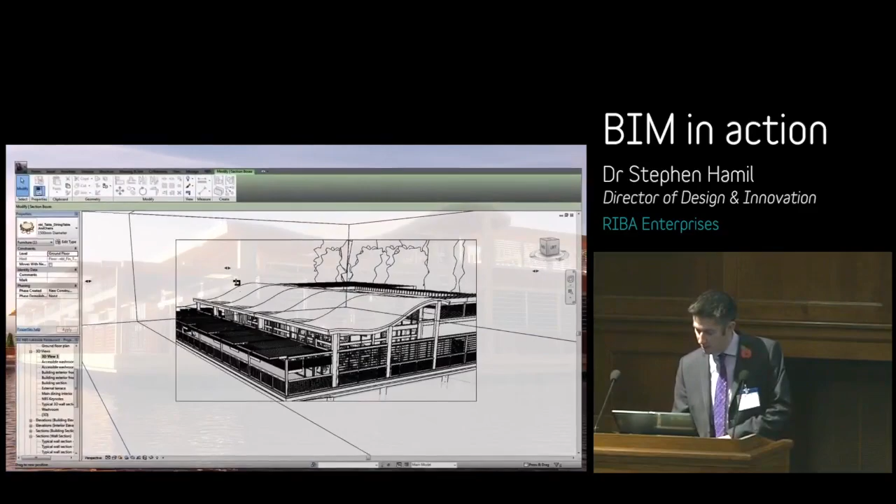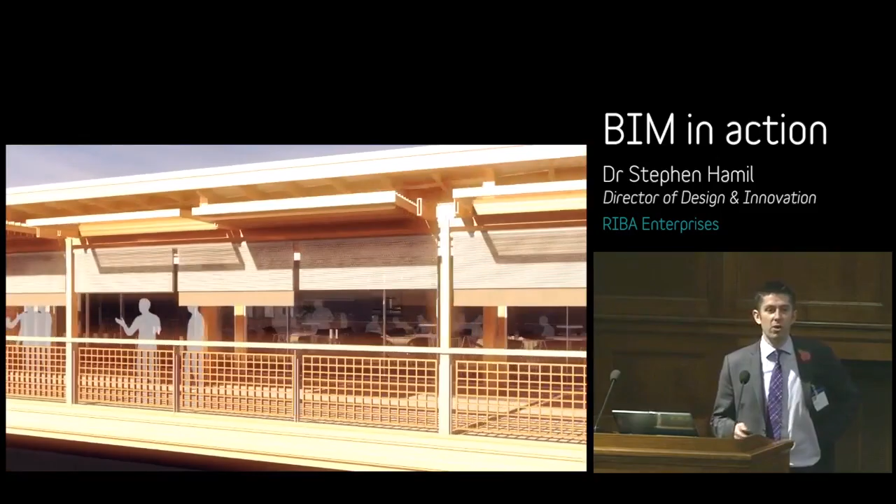First thing I'm going to do is show a little video to illustrate the visualize side. This was the video that was playing when everyone came in. This little movie's been put together from one of those 3D models that Dave talked about, and the quality is incredible - it allows you to actually visualize the building before, maybe at that concept design stage.

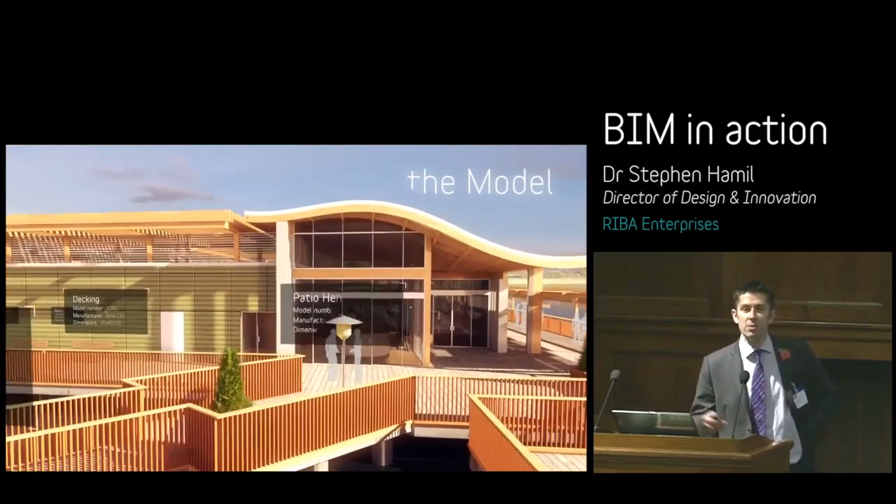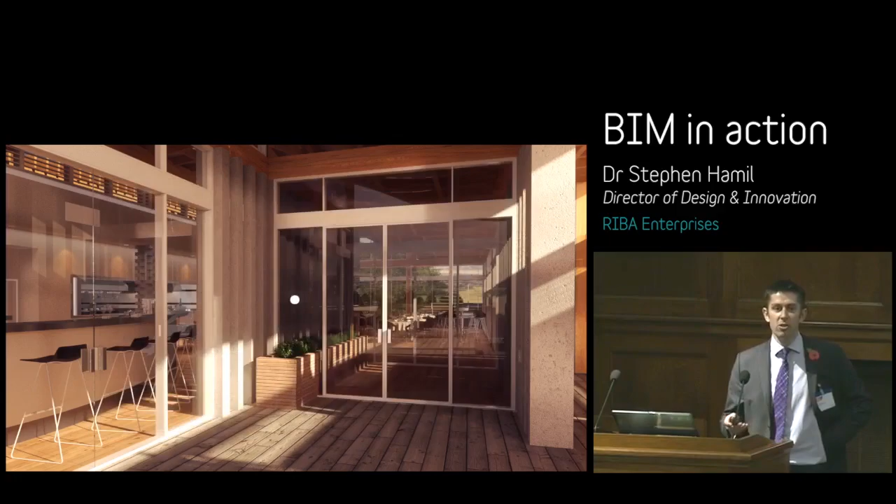So you've got advantages there right across - sharing the vision amongst the project team, also sharing the vision to the client, selling the dream, winning contracts. That's an amazing thing that's possible now at relatively low cost, as opposed to trying to win bids 5, 10 years ago.

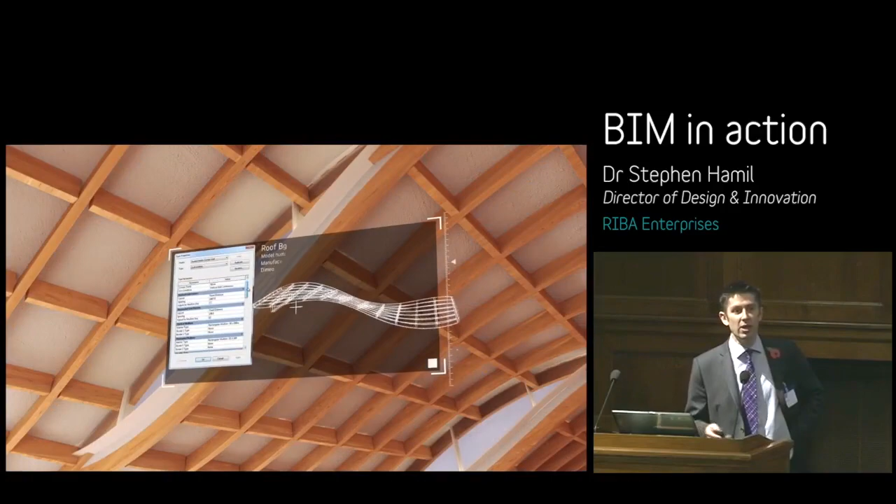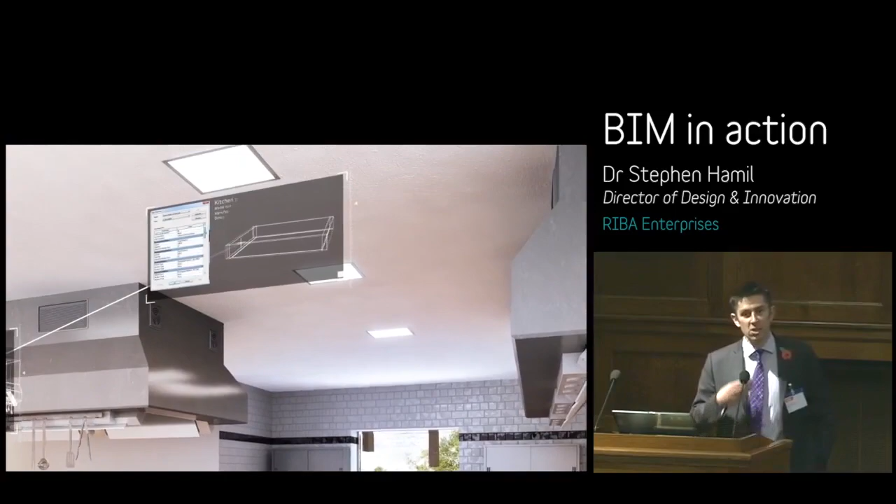And then the client can take those visualizations, that dream, and sell it to future occupiers. So if you've got a large office block that you want to rent out on contracts for the next 10 years, you can start getting that in prior to the building getting built. You can also share what the building's going to look like to the local community, so they can see the sort of building that they're getting built in their area.

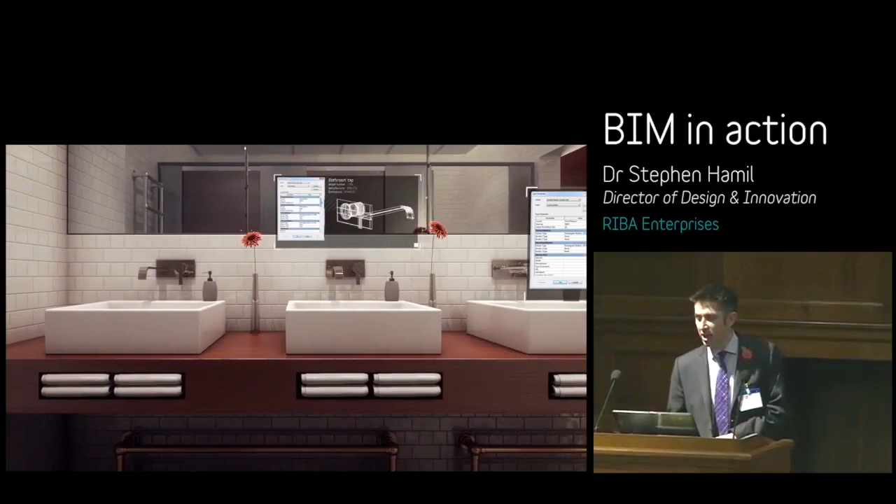So it's a bit of a superficial benefit of BIM, but the visualize side - you can watch that whole video on our website, the link is in the presentation. But moving from visualizations...

Moving on to coordinated design. So when you think about coordinated design, how that was done in the old days was people on the drawing boards, and you'd have to coordinate all of the different drawings that communicated your design together. You made one change in one drawing, you had to then update it on all of the drawings, and then different consultants as well.

And that's the sort of thing that's so easy to make a mistake if you're working in traditional CAD - delete the door, it deletes it from all the drawings, all the schedules, all the sections. So making sure that the information that comes out of that single model is coordinated is fantastic in terms of efficiency and also quality of information that comes out.

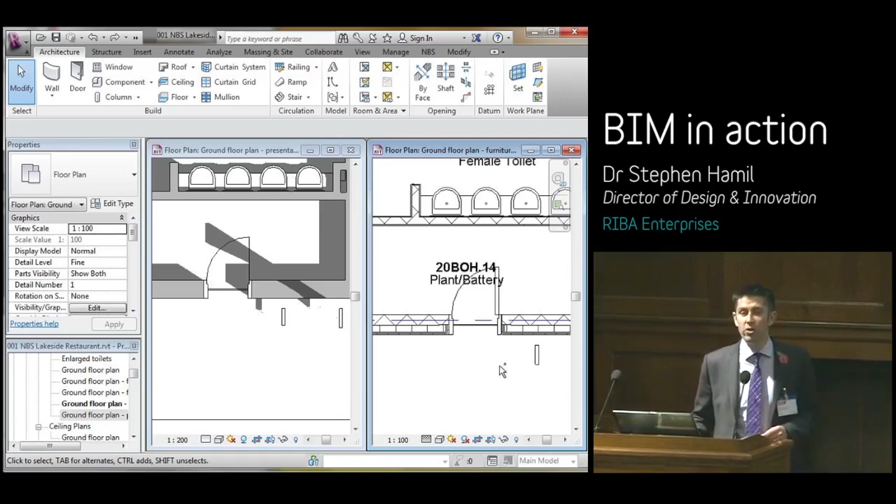So moving on to the third great thing about BIM, or cool thing about BIM, we look at space usage. We've got 2 generic boilers that have been put into a plant room, and that might be at an early stage - you don't know what the manufacturer is of the boiler, you just know the building of this size needs 2 boilers. And it's not just the boiler itself, that could just be a rectangle cuboid on the wall.

It's the space around these MEP objects, because you're going to have to go in and maybe change the heat exchanger. After 5 years, the boiler might be faulty, you've got to take it off the wall, and you've got to be able to get around. So these particular BIM objects there from NBS, we consider the space around as well, so you can see a clearance zone. That's been done researching the leading manufacturer recommendations out there. So the service engineer can get the model from the architect, the structural engineer, and put the services in that are required, but check that the space allowances are there. So you can see that boiler's too close to the wall, you move it a little bit, you move the other boiler, and you can get the right space requirements for operation inside the various plant rooms.

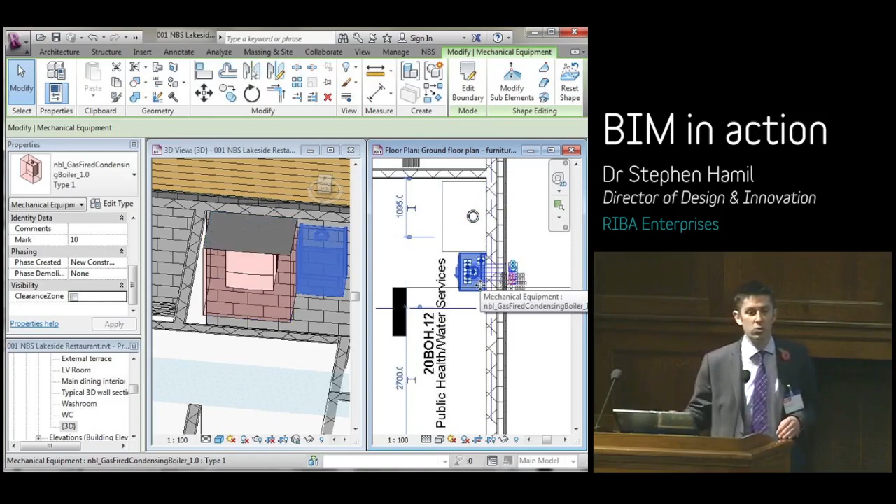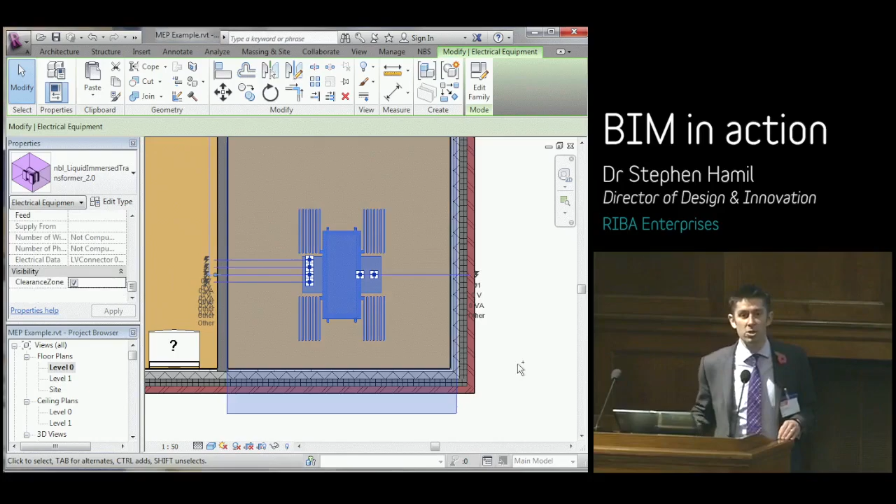If you look at a trivial model here, just with some other MEP objects, again from National BIM Library, a free resource to industry, we look at the transformer, and if that's got a dedicated room in the plant room for the liquid immersed transformer here, again from the basic regulations and standards for the UK, not the United States, not Australia, not the Far East, there's a 1 metre service zone that can be indicated around the transformer, so the space that's needed so one person can safely operate it whilst maybe a colleague comes behind. You can see there the plant room's not quite big enough for that transformer, so you'd maybe want to send that model back to the architect and get them to move the partition wall a little bit.

Maybe a slightly smaller object there - again it could just be that the geometry is not the most important thing here. There's a little sounder on the wall, and what you can do is toggle a little option, and you see the symbols that are typically used by consultants in the UK to indicate service engineering devices that are reasonably small. So you can imagine you zoom out of that floor plan a little bit, you can scan across the spaces there and see exactly where the sounders are.

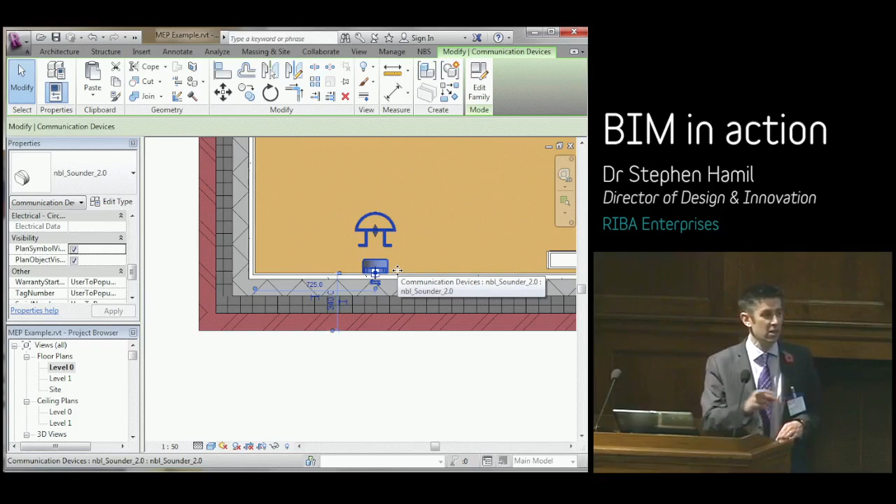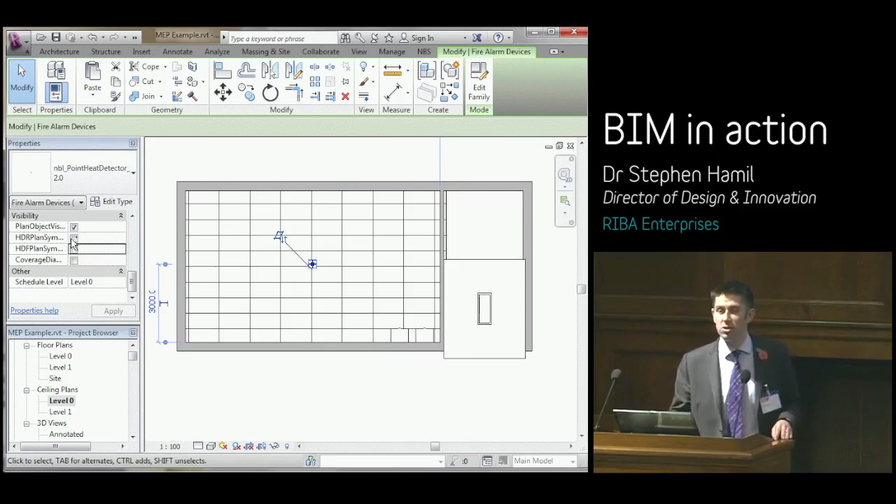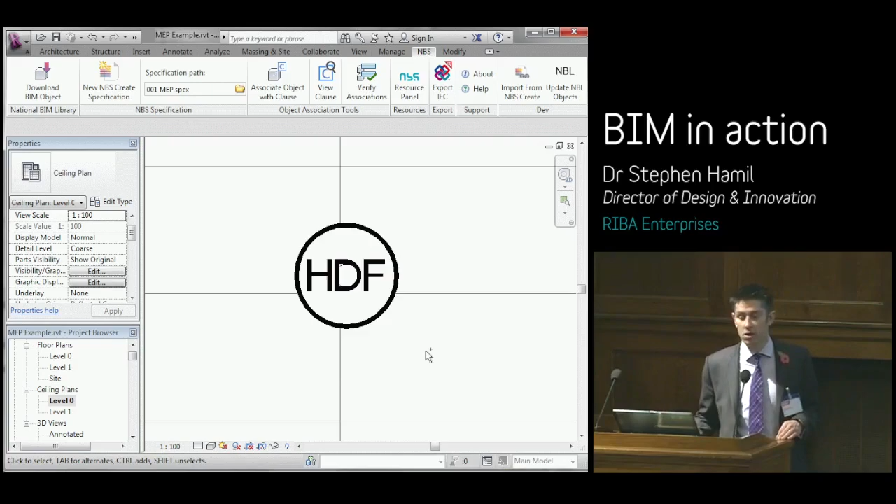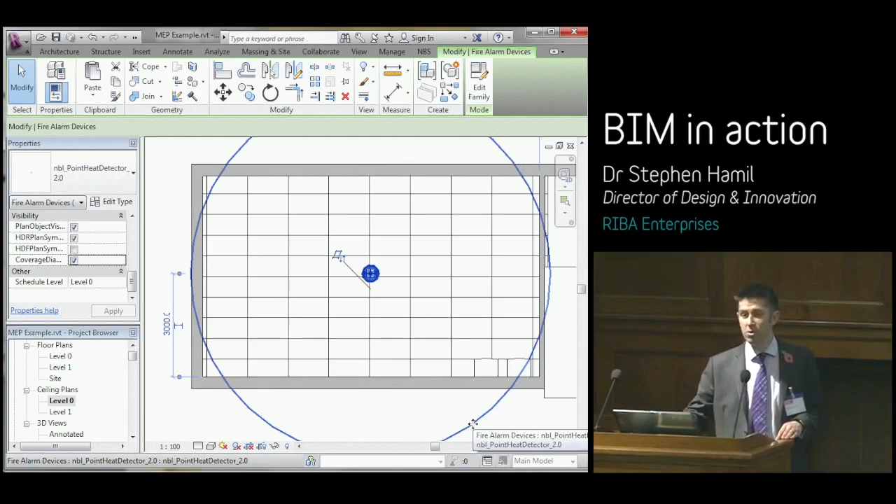A final example here, staying on the engineering theme: here we've got a point heat detector in the space, maybe in the plant room again, and you've got the little symbols again, you toggle on and off. So here we've got a heat detector with a fixed detection rate, or maybe a rising one. In a boiler room, you'd maybe have a fixed point heat detector, and you can indicate that, along with the area around - a coverage diameter. In the UK, British standard indicates a diameter of something like 10.6 metres. So you toggle that on, and you can see how many heat detectors you need for that particular space - probably you need maybe two heat detectors for that plant room.

So we've had the visualizations, we've had the coordination of the geometry, and then a little bit around the space required around the geometry. Again, staying more on the design side, analysis of the information. So if you look at any of these 3D BIM objects, it's not just about the geometry, but inside there's a lot of information, a lot of properties, and those properties actually relate to each other.

Over and above that, you have performance properties, as defined by the international IFC 2x3 standard, and operational parameters, as Dave was mentioning with COBie.

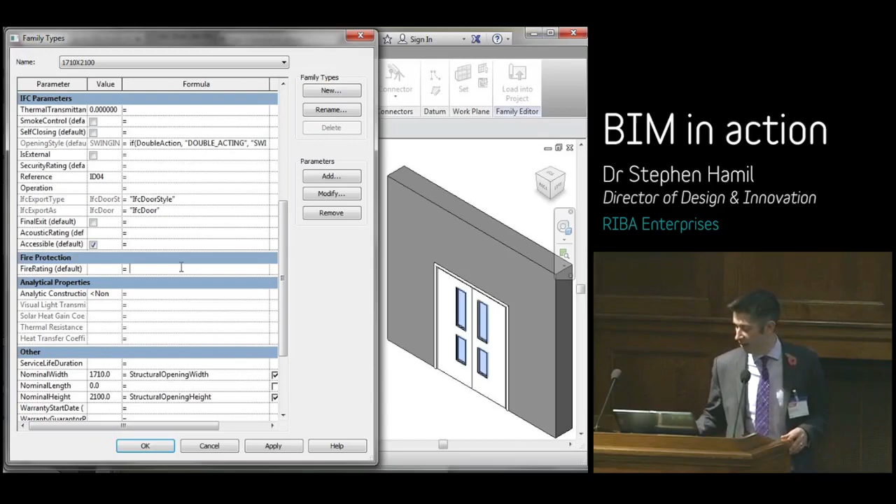Things like who was the manufacturer, what's the model, where's the installation manual, operation manual, expected life, etc. So you could take some of those performance properties. For a door, you might think of it in terms of acoustic performance, fire performance, and the little numbers you can see on the drawing here, the number 60, they're actually coming from the properties inside the 3D model.

So that number 60 indicates a fire performance of 1 hour, 60 minutes. There's a little bit of color coding here on the analysis to say everything that's 2 hour fire rating turns red, everything that's 1 hour fire rating turns blue. If you think of the UK regulations around a kitchen space, approved documents for fire safety, it's a 2 hour rating, so a commercial kitchen needs 2 hours fire safety for all the elements.

So you can quickly see that those doors, those internal double swing doors, haven't got the correct fire ratings. You visually see that through the colours, through the numbers, highlight them, change them to 120, and you see the colour turns red. So you could then show that to the fire safety officer and the client.

They can scan through that fire drawing and see all of the different fire ratings, the various escape symbols. So you see the exit sign, as you see over our fire exits, oversized in 2D plan, in line with things like heat detectors, sounders.

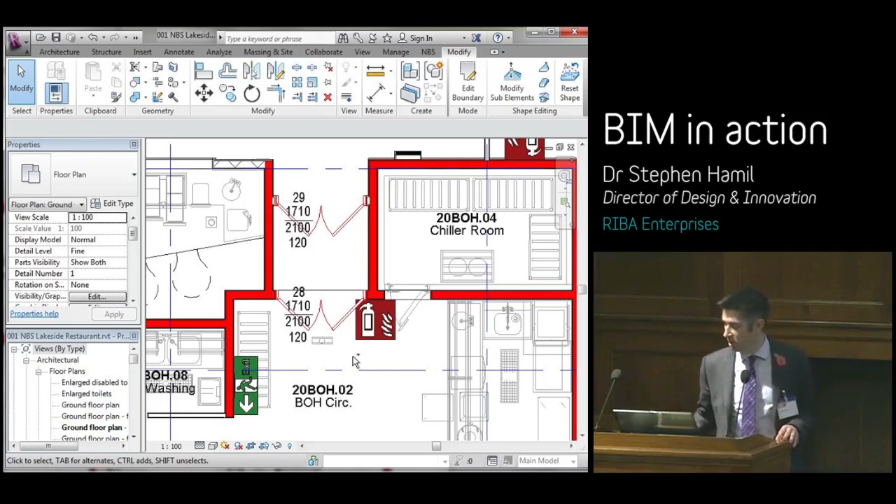Building on one of Dave's points, it's not just about the information trapped inside those 3D objects, but the whole wealth of information across the project team. That includes specification, cost information, environmental impact. And if you look on the specification side, the leading specification products out there are now object-based as well. They're not objects you can see in 3D, but they're objects that have got property sets and are related to other objects.

So what we can see there is a specification for a low temperature hot water system. And before thinking of any of the products—maybe you're not getting paid to design any of the products—you can actually design the overall performance of the heating system.

So you can see here I'm invoking specification clauses for the performance of the heating system, for the quality of the design, for submittals. And then at the bottom of the heating system, there's also specification clauses, objects with property sets, to talk about system completion.

When Dave talked earlier about soft landings, making sure the client gets the best possible building for their money, it's all about specifying the correct performance. And if we look at the little clauses here for system completion, it's about commissioning, performance testing, to test that performance has been met.

It's about demonstrations, so the client can actually use the heating system, inspections, test records, documentation, operating tools, services and maintenance. That's the sort of thing when consultants are working for the client, they want to really get nice and tight in their performance spec and model that information.

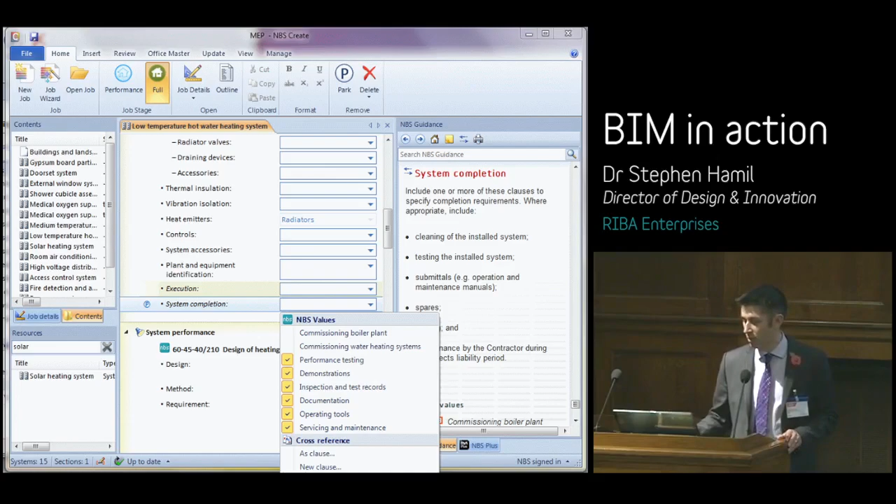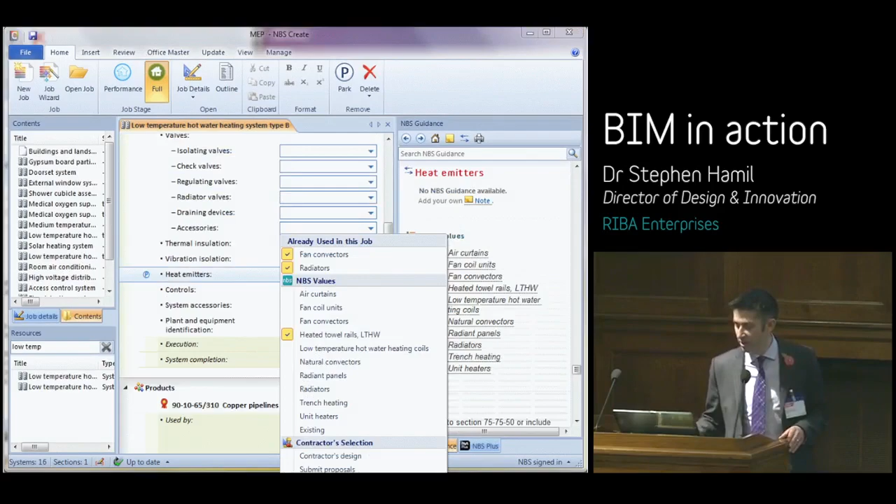You can also use these specification tools to pick all of the individual products. So come across here and pick a particular sort of fan convector, radiator, towel rail, and specify that generically. But then sometime down the line, someone's going to pick a manufacturer's product based on the generic specification. So I could specify a particular boiler through its heat output—it needs a flue on the top, it's got to have certain seasonal efficiency.

And then at some stage, somebody, whether that's contractor, subcontractor, or even right at the start, the client, somebody will pick a manufacturer's product. And here you can see the Econoflame R30 Stokvis boiler is getting added to the specification.

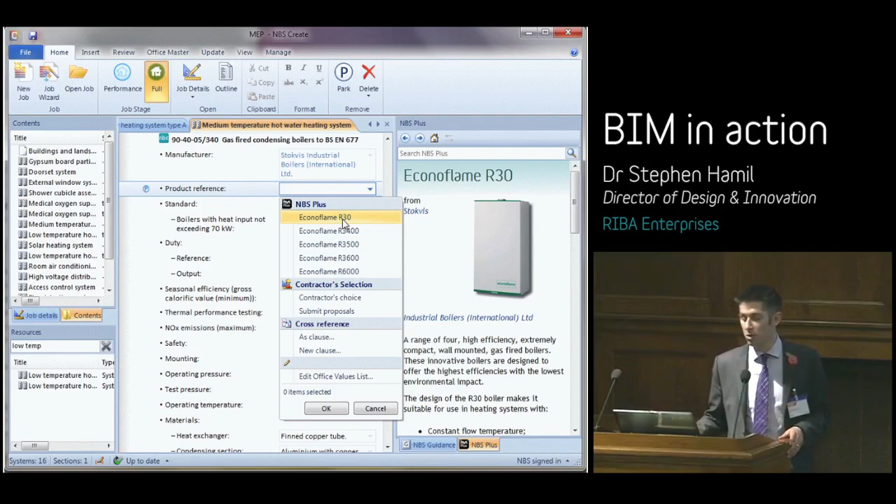So 2 more cool things to go. This is coordinated information. We've got great property set information built up in the specification. We've got fantastic stuff over in the design model. How is that information coordinated?

What you can do here in the UK—there's a little plugin for many of the design tools. Our company, NBS, has got a plugin for AutoCAD, Vectorworks, Autodesk Revit.

Through that plugin, you can actually link information in the design model to the specification, to the guidance, to the standards, to the regulations. This is something in the UK that we believe we are real world leaders on. We watch what's happening in Australia, in America, in Scandinavia, and nowhere else in the world has got the link between specification, guidance and the design model.

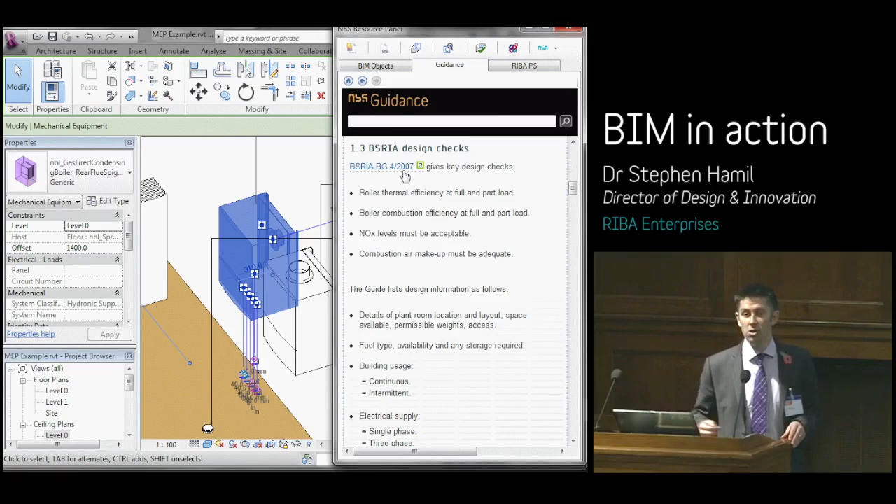So here, the user clicks the boiler. On the plugin, they ask for the technical guidance, and you can see all of the design guidance for boilers. We've got the BSRIA design checks, biomass fuel steam boilers, regulations and bylaws, environmental issues. This is the information designers need at their fingertips, through the combination of quality UK information linked with leading international software packages. So we can click on the BSRIA design checks and go straight to the BG4 document.

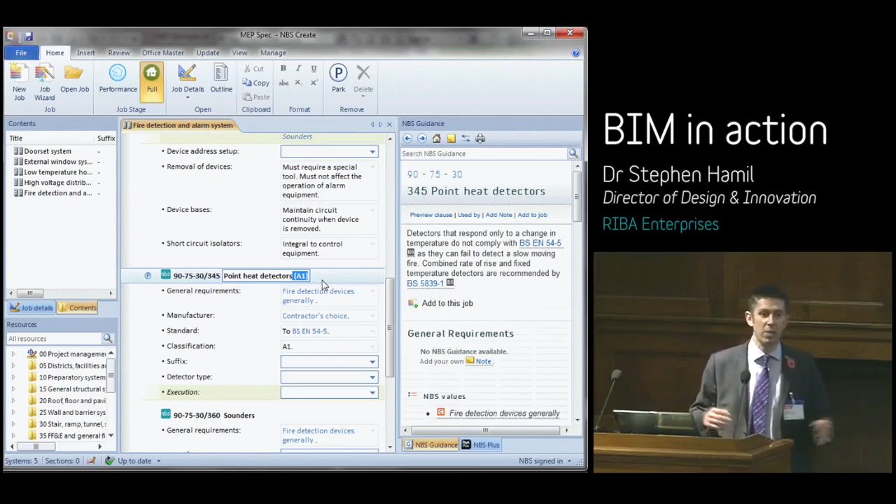It's not just about feeding information in, it's about coordinating the information. So in the specification here, we changed the point heat detector to an A1 classification. Annotated on the drawings, the titles may not match, or it might have been removed from the spec and no longer be in the drawing. You can ask for a report, and it flags up where the problems are. It's not quite as seamless as changing it in one drawing and it automatically changing in another, but the information's getting flagged up.

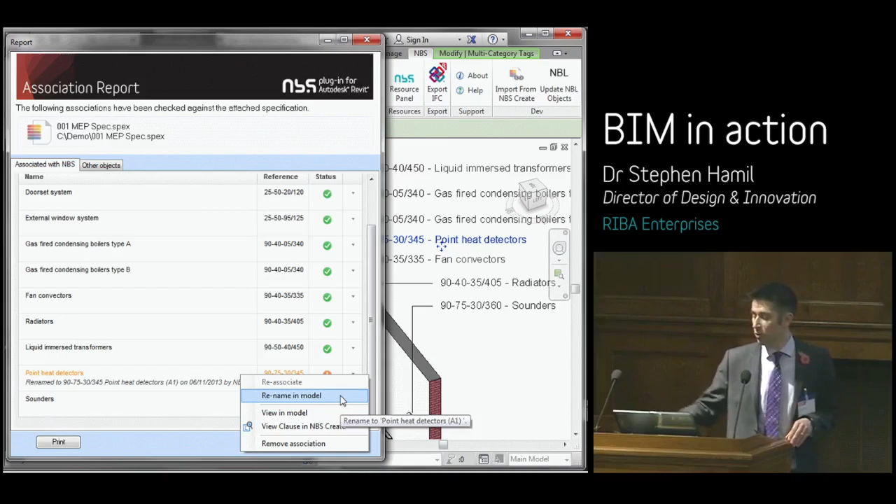So the architect has changed something in the spec, and the technician working in the design package has now got a report of that. They can have the conversation and push that information through. So if you watch what happens to point heat detectors on the right, the title comes through and coordinates, and you've got no further problems.

So you haven't just got the specification and the design model coordinated, you've got the objects coordinated within those two models. And what we're working on is taking it to the next level, so it's not just the objects but the properties inside the objects. We're not talking about putting all the information in that single geometric model, but you do want the key information there that will help you with analysis and with things like instance schedules, door schedules, radiator schedules, mechanical equipment. So let's look at the schedule here.

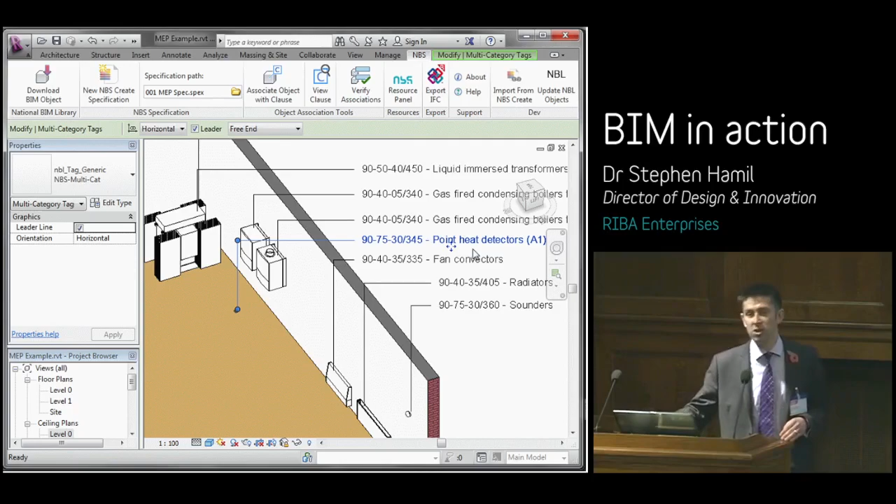We can see we've got the two boilers, type A, type B, with their property sets. Over in the specification, this is probably where you want to make those decisions. So what are the NOx emissions? You read the technical guidance, read about the BREEAM assessor's manual, and you want to drop 70 milligrams down to 40 milligrams. You make that change in the specification.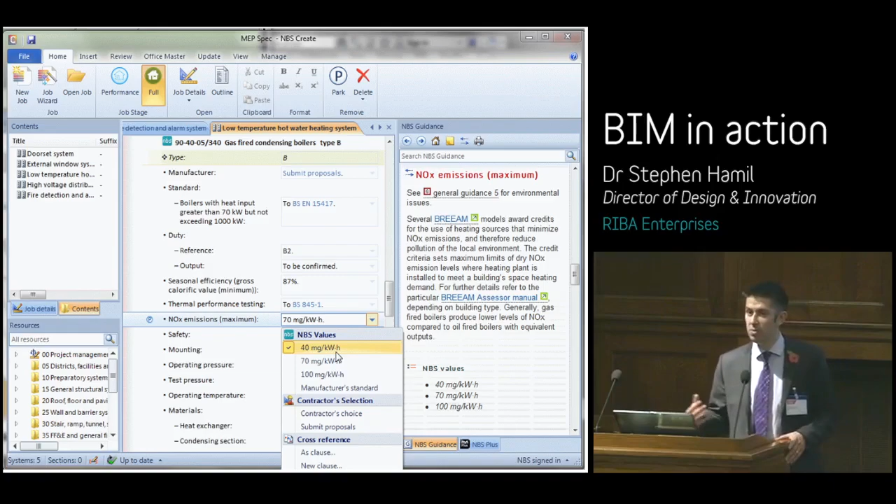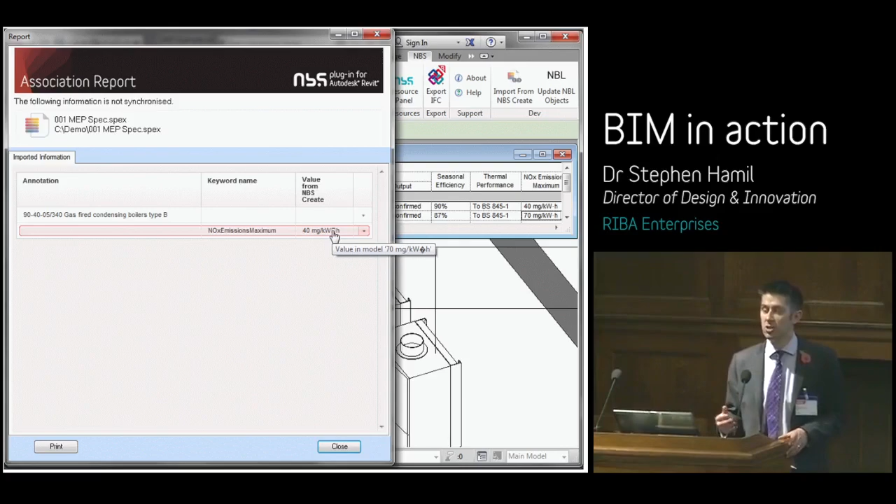Now you've got a problem, because that's incorrect with what's in the design model. And that's always been the case, whether you were doing a drawing on a drawing board and a spec on a typewriter, but you've never had help before. Now with BIM, with the technology available, following the right process, you can click on that report, and it tells you 40 milligrams in the spec, 70 milligrams in the design model - what do you want to do? You can make that informed decision, and it's pinpointing and highlighting it to you.

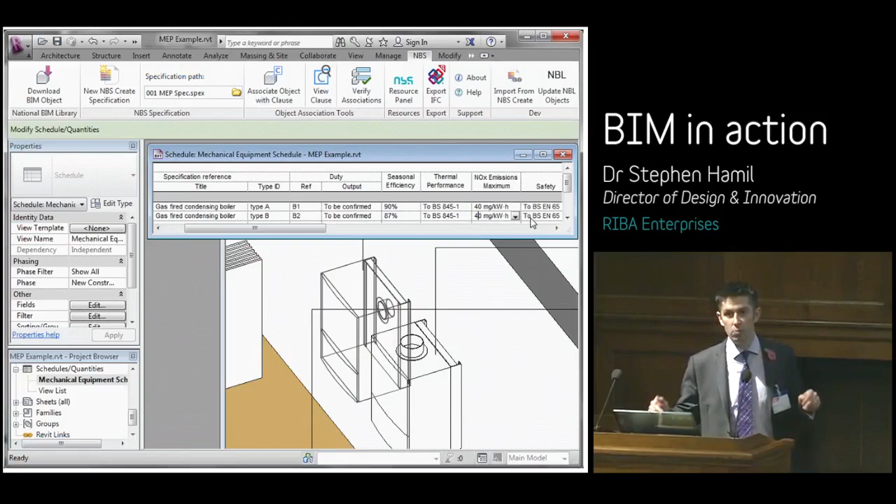Pull that up, and all the information is now coordinated, not just at the model level, not just at object level, but at property set, at the real technical information level.

And then finally, checking on time, information flow. So the seventh cool thing that I personally think about BIM is not just the information at design time - and this is probably the most important - the information flowing right through construction, handover, and in use.

The way I talk about this is maybe a little bit oversimplifying it, but if I was writing a document in Microsoft Word, there's loads of amazing functionality. I can do mail merge, track changes, add comments, and use whichever package I want to write my document. But when I want to issue it to somebody else, Microsoft might go out of business in five years' time, be overtaken by Google or Adobe. I want that to be in a format that any other software can read.

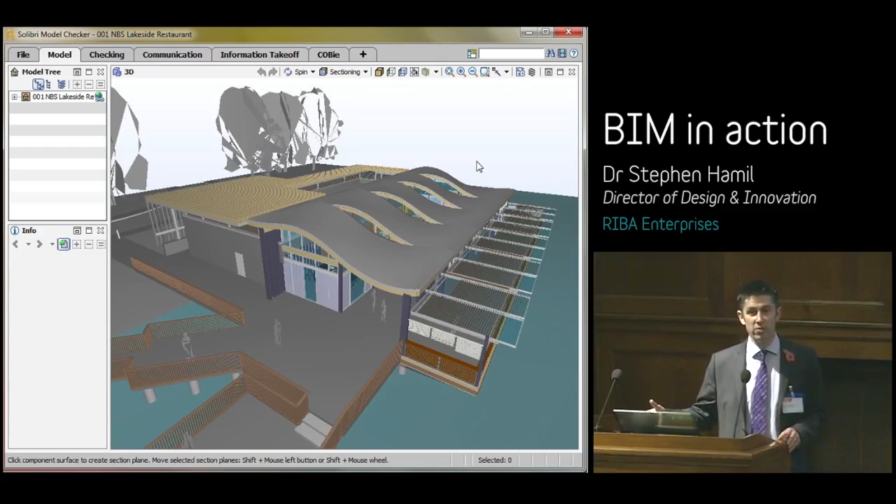So I export it to PDF, and the client can use a free tool, Adobe Reader, to read all of that information. It's still got its structure, its table of contents, its hyperlinks. Construction has that same principle, because you can export to a format called IFC. Here's exactly that same model, and the information from design tools like Bentley, Allplan, Vectorworks, AutoCAD, our sponsors Autodesk, can be pushed into this IFC format, and also from things like the specification tool. So you're getting all of that information into an open source format that the client can query.

So what about that boiler? What's its spec? What's its installation manual? What's its operation manual? And that's there at the client's fingertips now. And the speed that technology is advancing, this is the sort of stuff you can get on your iPad now. You could go around the building, say, which room am I in? What's the operation manual of this boiler? I've got to change the heat exchanger. And that information's at your fingertips.

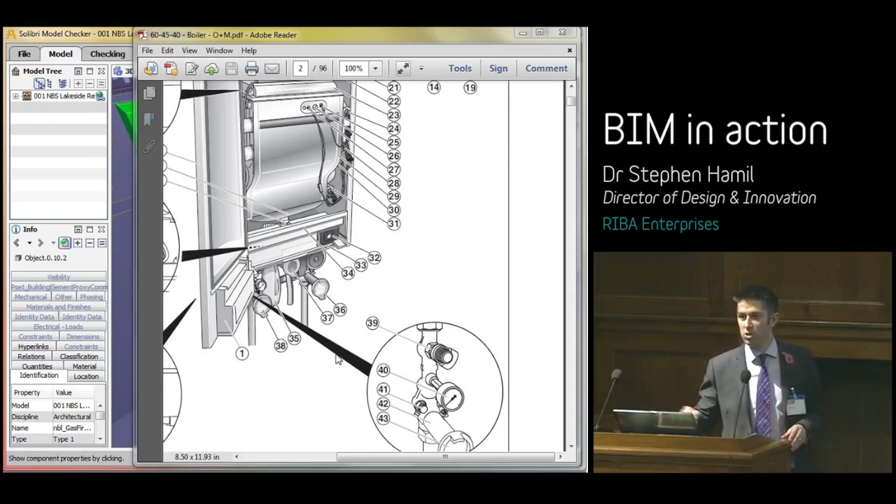And it's not in a series of 5 boxes down in the boiler room, which have got wet because the boiler room flooded. It's there digitally in a robust format. And more advanced, intelligent clients can query this IFC information any way they wish. So give me a report on all the doors and the different fire ratings, acoustic ratings, what rooms they're in. And there's that report coming off IFC, an open standard format.

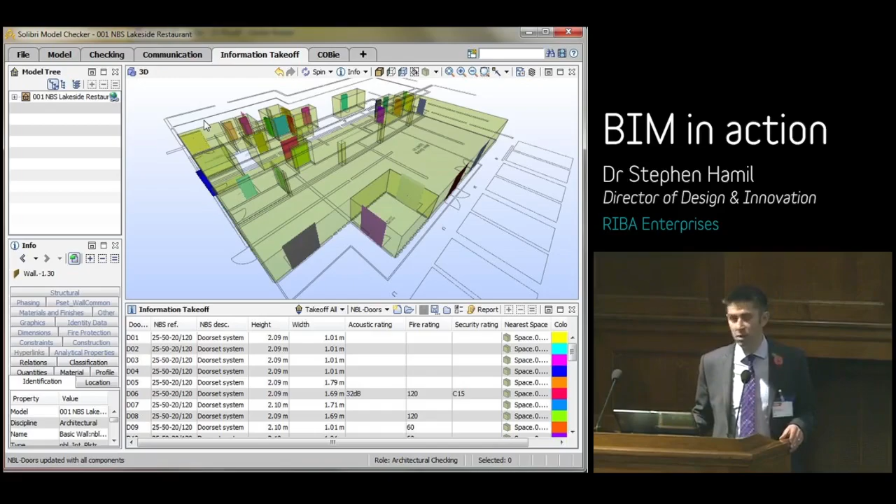And then finally, Dave talked about COBie. In fairness, it's a hard subject to do justice to in about 30 seconds. But COBie is that standard, almost dumbed down format of IFC. So you've got the IFC model at the top, and at the bottom, what you've got is the COBie defined data set.

In its most simple terms, what you can see on the screen is a building - if you look at the little worksheets, it's facility properties, how many floors, how many spaces on each floor, and then the components in. You can click on any of those little worksheets. It's attached to a relational database and you see that important information in an open standard format that's not tied to any one software vendor, whether that be NBS, Bentley, Autodesk, whoever. Open format data for the client in a rich digital form.

And that essentially is the government's strategy when it comes to BIM: let the market compete on the best products, but at the end of the day, we want it in an open standard format for our FM systems.

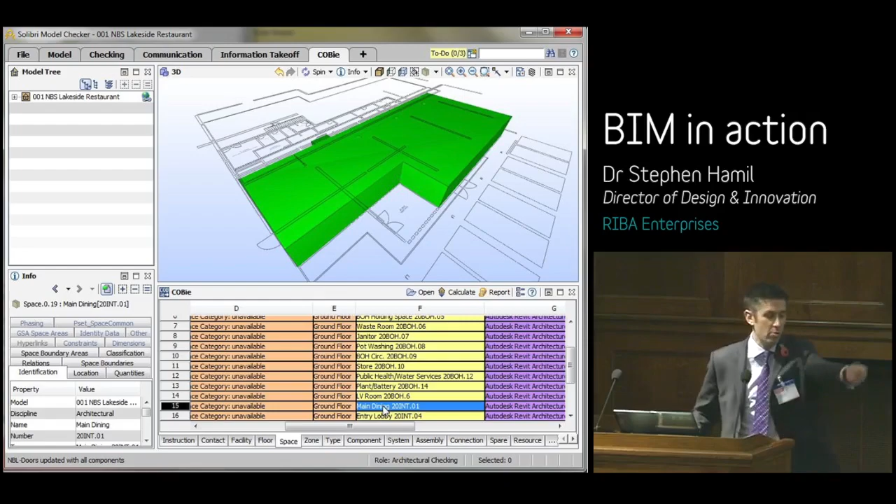So, in summary, just about on time - BIM is happening. Clients, designers, contractors, as you're going to see today through some fantastic presentations, are using BIM now. What we're looking at there is in the market now. That's not future gazing in 10 years' time. This is happening at the leading edge of UK construction.

And why is this happening? It's happening because it's a more robust and efficient process, right through the project timeline. If you get a chance, go and download the new RIBA plan of work, which talks about that information flow from strategy to preparation through the different design stages - concept, developed, technical, construction - and you can use that BIM process all the way through.

And there's plenty of free support out there to help you on your journey. I'll just leave you with three websites - to reinforce Dave's point, bimtaskgroup.org, a fantastic website, please add that to your internet bookmarks. Our own website where I work, thenbs.com/BIM - there's loads of free video presentations, case study articles. We do a national BIM report every year. So thenbs.com/BIM, all the resources there are completely free.

And then finally, the objects I've been demonstrating today all come from nationalbimlibrary.com, which is funded by manufacturers, because manufacturers want their objects on there. But the great news is it's completely free to UK industry. There's objects there that are concept objects, there's objects there that are detailed but generic where a manufacturer hasn't been mentioned, and we're getting an increasing number of manufacturers coming on board now with their actual objects, with their information inside.